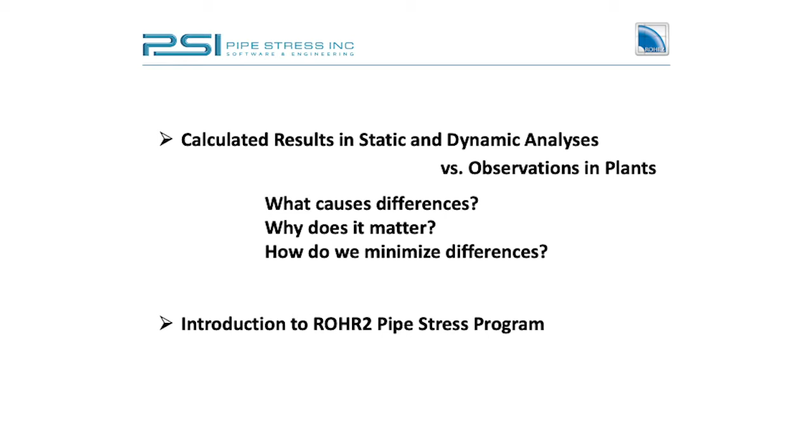And I'm going to tell you a little bit also about the Rohr 2 pipe stress program. I was reminded what Rohr even means - Rohr means pipe in German. It's a German product, I've used it for just about 30 years. I've used Caesar for just as long, pretty much, and other products like AutoPipe, pretty much all products.

All right, let's dive right in. So you'll see this screen occasionally, and you'll know kind of where we are. So we are at the top.

When one puts this kind of geometry in Caesar or Rohr 2, it doesn't matter, the weight will distribute itself statically, and you'll have, let's say, half of this piece of weight on the nozzle, as well as a flange and some things in the local area. There's vendors on equipment, for example in turbines, that say we don't want to have cold load on the nozzle, because we want to see the flange, the piping flange, float above the nozzle, and we want it to be parallel too. We don't want to be at the top, because now when you tighten the bolts, you're going to get a moment. So what do we do?

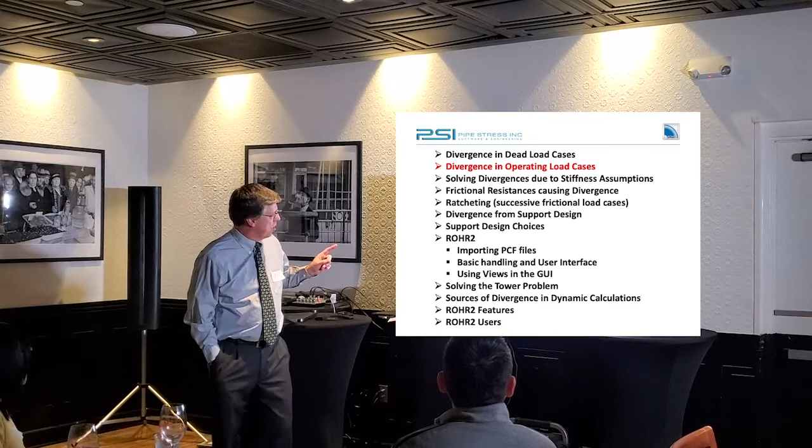These kinds of things are something you're very familiar with, especially east of Houston. My client said, here's what we're going to do. We're going to hold onto the pipe here in all translational directions, and we're going to guide it a couple places down the tower. It's a very common arrangement that you hold the weight of the pipe near the nozzle at the top, so you have very minimal strain in the thermal cases between the support and the nozzle.

Well, that's not the way the program works, right? You put it in, I have a hard time connecting it and not connecting it. So there's no free node, there's no string. And my client says, well, tough—I want to see the 900, I want to see 0.

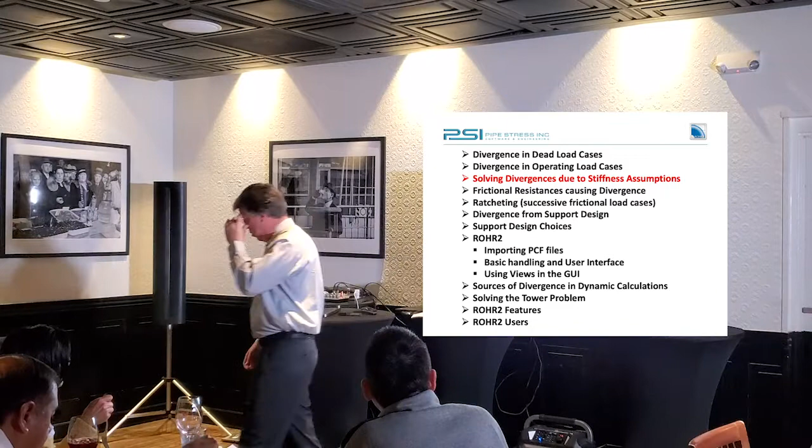Now, I'm going to come back to that. I'm going to show you what I do and what I did for this client. We're going to talk a little bit more about engineering and general things.

Another thing is, in this case, let me show you this. You could have in the operating case divergences based on these relative stiffnesses. We're fairly confident about the stiffness of a pipe, but we're maybe not as confident about this plate that's holding it, especially where the plate hits the vessel.

There's spring stiffnesses, it gets pretty muddy there, and if it's too muddy, we're having divergence. When I say the word divergence, I want you to think about calculation versus reality—that's the divergence I keep referring to. Since a lot of this talks about that divergence, what we do about it, and where it happens, you're going to hear that word a lot.

Now, the next topic about divergence - frictional resistances that cause divergence. This is a big topic and problem with pipe stress, because the frictional resistance is essentially a force opposing the movement that the program calculates. These forces oppose the movement by the friction coefficient times how much weight is there. There are a lot of different ways friction causes divergence. At some point I'll move into how we solve this - one way is to try to bracket the problem, because friction can be a very large issue.

So the cold to hot would be in that situation. What about when - friction is of course not a one-time event, so it resists and then it kind of slips, right? Because of kinetic friction versus static friction, it resists and slips many, many times during the warm-up. But essentially you're only seeing one side of the moment, and because we don't show that it slips, we just see these opposing forces - you can actually have a nozzle load lower than it would actually be if there were no friction. We can't rely on friction to help us out with our nozzle loads.

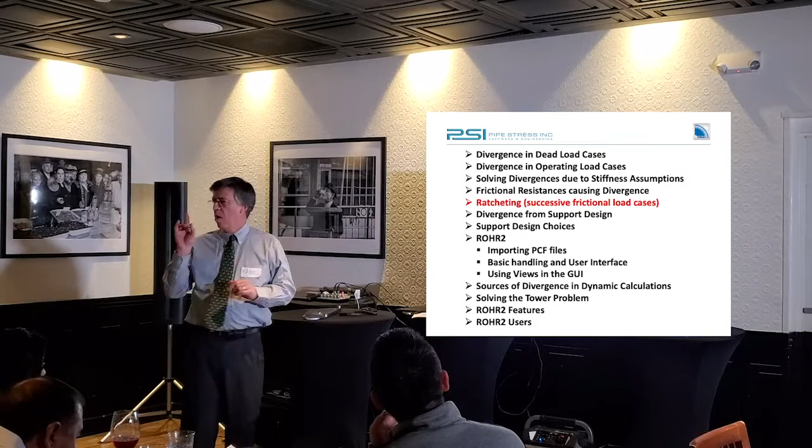All right. You can interrupt me if you have a quick question. I don't want to take a lot of time going down a bunny trail, because I do want to finish.

Okay, on the same topic of friction, in my observations in the plant, many times I've seen this happen: ratcheting of the pipe. That is, the friction going one way is a little different than the friction coming back, so it doesn't end up where it started. Again, divergence, because in our models we go cold to hot, boom, here's the loads, end of story. However, in real life, pipes tend to ratchet themselves to places you could never have imagined, till they're off the steel. They were once up there, now they're down there, and this poor guy that used to be held up is now bent, right? This happens fairly often.

And so, let me show you what I do for that ratcheting kind of thing. I've made a model that's very simple, and not only can I in ROHR2 go cold to hot, I can go from hot to cold. And then I can tell ROHR2, in one load case called a follow-up load case, repeat this 1,000 times. Usually if you repeat it 40 times or something, you're going to see if something's happening, or if it's actually going somewhere.

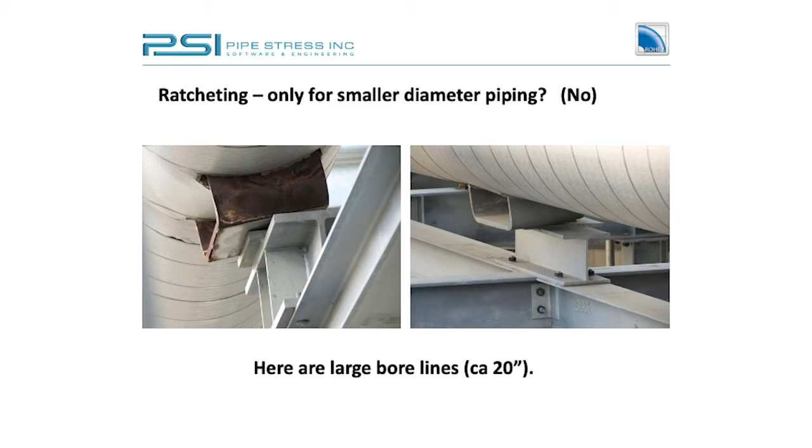here's a large bore pipe, 20 inches, that ratcheted itself, not a good situation. This is an interesting case. I'll confess, it's on a plant I designed in '99. Took this photo when I came back. This is a bypass pipe that goes into the condenser. This is attached to the condenser in very near proximity. The shoe started out there. It's not there now. It hasn't fallen off yet, but it's getting mighty close. So every job, luckily, I get to learn too.

All right, we talked about how the friction is nonlinear. That is, there's not only the static coefficient but the kinetic one, and it kind of shifts a bunch. So, depending on how much stiffness the steel has to give and then bounce back, you can make a huge steel model. This is in ROHR2 in the steel model. But in the end, if we don't bracket the problem properly, like this broke out from friction, the friction was not looked at correctly, and the calculation pulled the Hiltis out of the ground. So there's a lot I can show you. I've got mounds of pictures of things that happen in the plants. I'm not going to bore you with all of them.

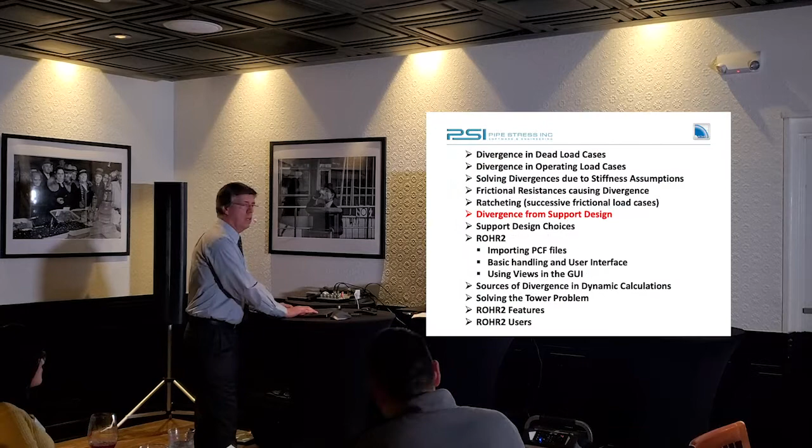All right. The next topic that I want to talk to you about is support design. Now I understand some of you aren't support designers. We're more of a pipe stress organization or association. But the pipe stress people have to have some idea about the support design. They have to know that the support design will, in fact, mechanically carry out what they're assuming in the stress analysis, and often that's not the case due to workflow and so forth. I'm not going to go through this all, but support design is where I'm going to focus for a couple minutes.

It's crucial to ensure that the support design carries out the intended function. I'm going to show you some examples where it didn't, and it's not necessarily the stress guy's fault, but the support guy goes, I'll put a shoe with some clips around it or whatever. I'm going to show you what can happen. And it's also important that the stress analysis doesn't make unrealistic demands of the support design. I'll show you an example. All right, I'm going to start with a very easy example.

I do some auditing work of stress analyses, and I've tried to erase the innocent and the guilty, so hopefully nothing will slip. But here's a steam pipe. A turbine was here. This is the design. And originally the reason I got involved is the turbine had a problem. And this support here was a moment-only support. Okay, you can laugh now. You can make those things. You can't go to CAESAR and put RX, or RY or RZ. It doesn't work. It doesn't exist.

Finishing up with this support design. There are different types of supports. Some have friction, some don't have friction. Some have gaps, some don't have gaps. The gap and friction issue is kind of married, because if you have a frictional support, you kind of need a gap. It's hard to not have a gap, it's going to get stuck, right?

So I think as pipe stress people that drive which support is going where, you have to make a distinction between supports that are near sensitive equipment, which is more or less what I've talked about now. If you got a pipe going straight down the pipe rack, yeah, it's not that critical whether you have gaps and friction. But it can be too, because the friction can gang up on you, if you know what I mean. All the frictional resistances add up, and all of a sudden you have a 10 kip load.

Your civil guy goes, where do you get this 10 kip load from? Yeah, it's all the frictional resistances ganging up. Which is another reason you could run a no-friction load case to see what part of it is bending the pipe and how much of it is just the friction ganging up. And it's not always conservative, right? So you could have the friction canceling itself, but since it's not all concurrently acting as it does in our programs, you could have a lower load too.

Alright, so make a distinction between supports that you care about and some that you just kind of guide so it doesn't fall off the rack, right? And I'll reiterate, the support design in critical supports, near critical equipment, has to be driven by the stress guy. Somehow, the management has to follow up to make sure that it's being carried out. I'll show you an example.

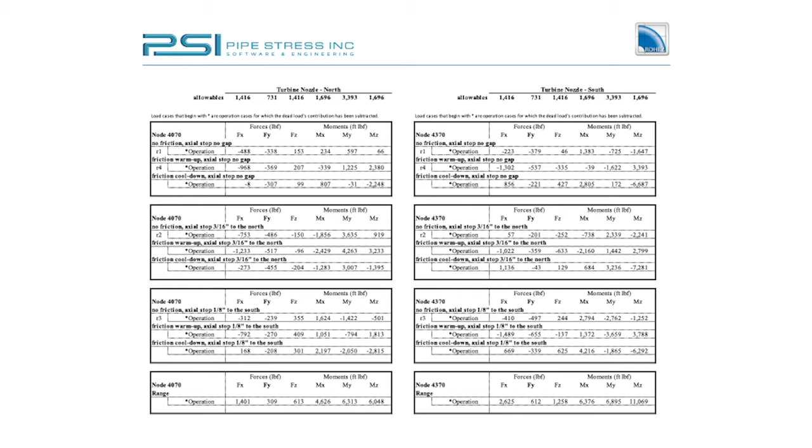Is that how the report comes out of the program? This is an Excel table. Yeah, the reports come out of the program very similar, but this is Excel because I'm trying to show. Here's no friction, no gap. Here's just adding friction, and here's adding both. And I did the moment reversal, so this is heating up, this is cooling off, and now I have a moment range that's 11,000, and it should be 1,600.

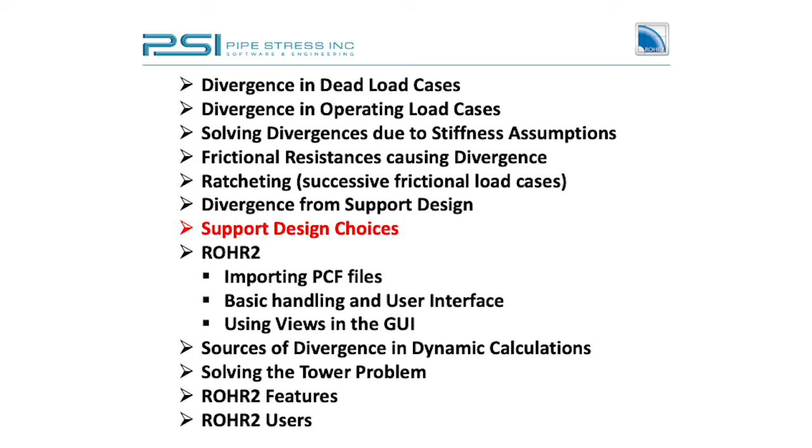And so I tried to explain that. At least you can read that. The other stuff that you get from other programs, you can't read. Alright, so I want to show you some physical supports. So you go, okay, I understand that this support should have no friction, no gaps. Absolutely it shouldn't, because friction and gaps mess up all your loads. That's why the guy didn't put friction and gaps in. But now the support designer has to carry out this function.

And I'm not implying with any of my stuff you guys don't know this, okay? So here's supports with friction and gaps, just some schematic. And because I say you have to have one without friction and gaps, I'm showing you a photo of one. Here's a support that's an axial stop. It's only restraining the axial translation. There's no rotational stop. It can go pretty much everywhere and turn around every axis because it's pinned. And these are rigid struts, and it's even pinned with what's called a round lug that's on the pipe.

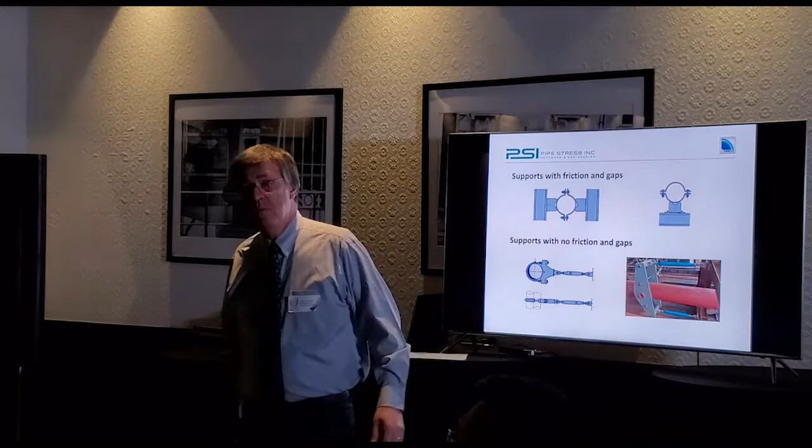This is Lisega hardware. We don't sell Lisega hardware, but the concept is fantastic because you can really move the pipe any which way, and Lisega developed this a long time ago. For an axial stop, I don't think there's anything better. And if you support it on a piece of concrete or a rigid point, you will have zero movements on the pipe. You won't have zero movements on the pipe if this is not connected to concrete or something rigid. If it's connected to the structure, you will have some movement. That's right. That's why you have to have rigid steel.

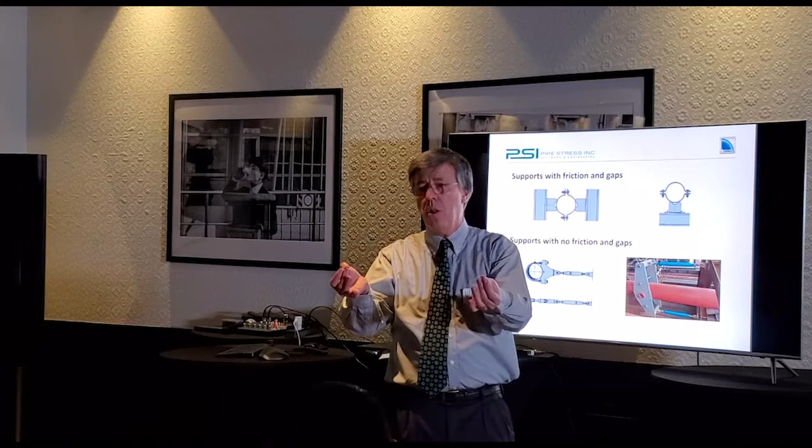That's a structural guy's job. These loads, incidentally, is a good point, and I'm not trying to negate that, but these were not very large loads. They're very small loads, and so the movement can be zero even with reasonable steel. If it's huge loads, you definitely need to look at the flexibility of the steel, and that was on an earlier slide. But this is to center the piping on the turbine, and even a small movement caused by a very low load would make an absolute nightmare of your turbine nozzles.

So my point is, some things are good enough to get the job done, but in support design, there's some choices that are not good enough, and they will not get the job done in certain locations, okay? Like I said, you're out there on a rack somewhere, it's all good.

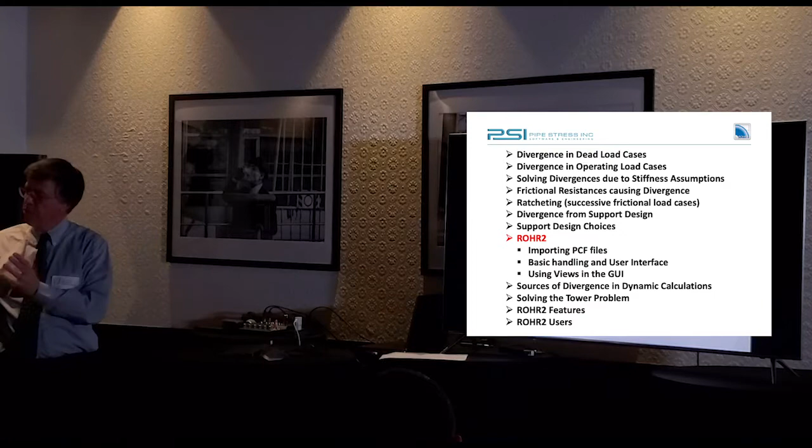Alright, I'm going to show you some ROHR2, so you get a sense for the user interface. And to your point, I'm going to show you quickly how to import PCF files. I'm going to show you a video from my website, because for me to do it's going to take longer than for you to look at the video. So humor me on that.

And then I'm going to show you in real time some basic handling of ROHR2, and then I'm going to talk about views, because I used to make kind of the inlet piping, the outlet piping. Now I put a lot of piping in one model, and because you can view just this or view just that, I'll show you that. I'll introduce you to that part, and then we'll talk about a couple more things.

So, in this video, I am going to show you how to import piping geometry into ROHR2 using piping component files, or PCFs. In ROHR2, click File Open, or simply click on the Open Project button. On the File Type pull-down, you will notice many neutral file formats that ROHR2 can read, such as CAESAR II, Intergraph, Autoplant, but for this video, we will choose PCF.

ROHR2 has the ability to open more than one PCF file concurrently. Typically, each pipeline name's geometry is stored in one PCF file. After choosing all the files wanted in the analysis, they are opened into a mechanically contiguous model. At this point, we are already in a position to run the analysis with the default load cases ROHR2 has created based on the temperature and pressure given in the import.

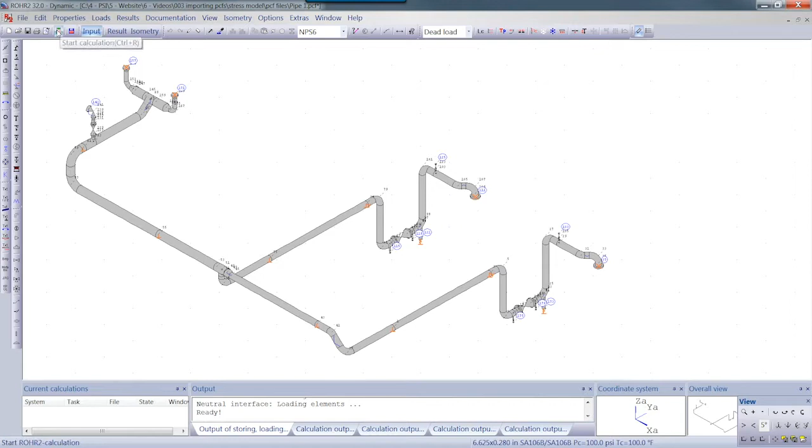We select all load cases and hit OK. Since we haven't saved the job yet, ROHR2 prompts us to do so. We will call this job test, and ROHR2 saves the job and runs the analysis. The job has run with no errors or warnings, so ROHR2 has saved, checked boundary conditions, designed the springs, since there were springs in this model, created and run the default load cases, dead load, operation, and shutdown.

Shutdown is a so-called follow-up load case to operation, where loads associated with returning from operating to ambient temperature are calculated. ROHR2 creates the default reports for the spring design, support loads, stress analysis, and a plot of the geometry.

Before we end the video, I'd like to point out that ROHR2 does retain the information that comes via the PCF file. The line numbers, which we arbitrarily called Pipe 1, Pipe 2, Pipe 3, and Pipe 4, are part of those piping segments data. Any support tags or nozzle labels are also retained. Thanks for watching.

Alright, I can't do it that quick in real time, so humor me with my boring voice in the video. My wife points out, that's like the most uninteresting voice. And in real life, it's not quite as uninteresting. You might think, gosh, I kind of like that boring voice, man. I'm waking up to it.

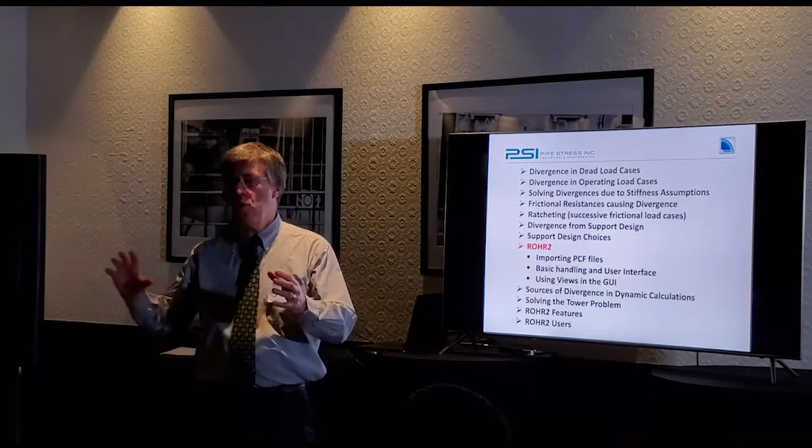And what about exporting to other programs? Exporting. Can I answer it at the end? Can you remind me? I won't go there. Got another question to this? Yeah. Are those sections imported or are they attached to an existing program? I don't know if I understand. If you have a program running or one system, you can attach another system to it and detach it. In ROHR2? Yeah, can you? Yeah. Or is it imported and stays there forever? No. Like you can. I constantly bring more stuff in and put it all together.

And to briefly answer your question, you can write PCFs, you can write CII files. There's some, you can get out of ROHR2 also. I mean, that would probably be the most useful.

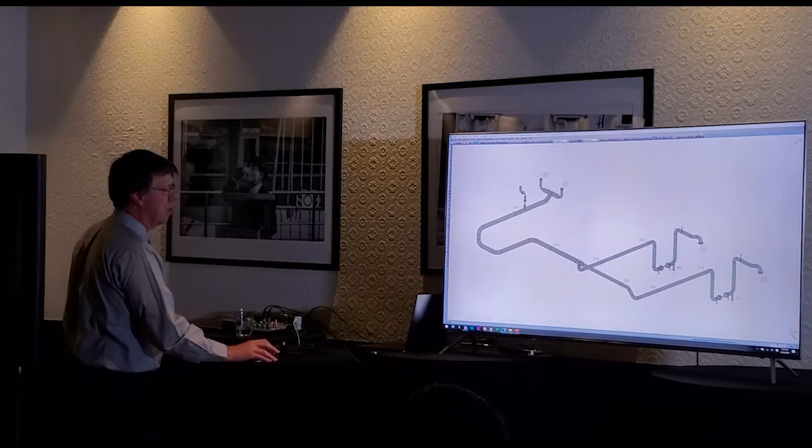Alright, I'm going to show you in ROHR2 just some basic handling in real time. I'll tell you what I'm going to do, and I think you'll get the idea very well. So I'm going to go to my next model, the one you just saw, and show you a couple of highlights here.

One thing I really love, I'm not saying nobody else can do this, but I don't know what programs y'all use. One thing I generally don't like is like iTunes, managing my life somewhere. I'm old school, I like to make my subdirectories, I like to do it that way.

But one thing I love about ROHR2 is the revision manager. If I go Alt, File, Save As, it ups the revision number. I can put in here based on, in this case I'm on revision 5, and it pulls up 8, because when I was in my hotel I saved it a couple times to 7, so it knows the next revision number. Then I'd type in there, based on revision 5, took out the loop, or whatever it is. So now, on one job I went over 100 revisions, and I have a record of every revision and what I did to the models. Very handy to have. So I'll just save it here.

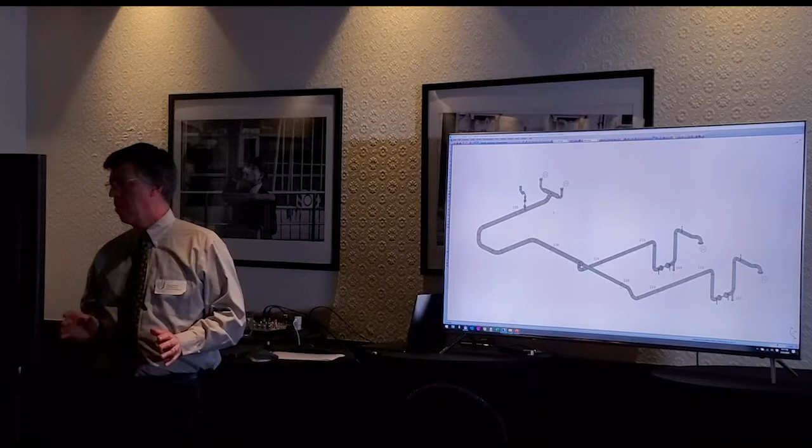Another thing is, after I import the PCF, there's two things that happen. One is I generally end up with lots of little piping I don't care about and don't want in my model, because it clutters it. I generally want to erase it. Very easy to do - you can filter the model by line size, select everything, and delete, and it's all gone. I'm going to show you how to do that in a second.

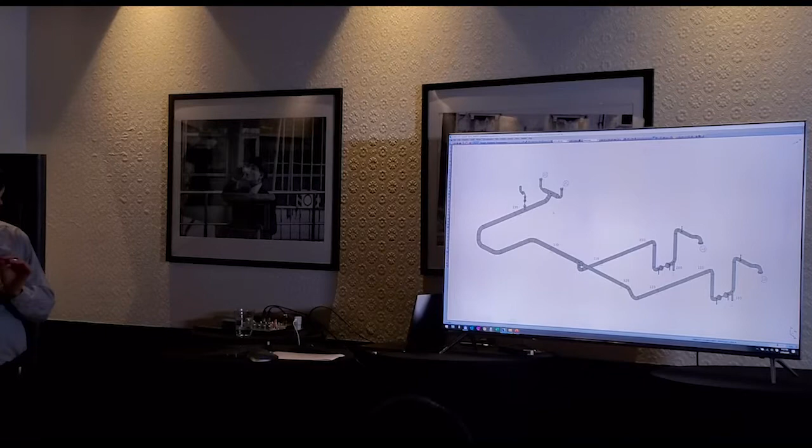The other thing I like is, it happens probably never to you, but the model is not mechanically continuous. The designer a lot of times sends me, 'can you check this,' but they really haven't run the ISOs yet, they're not really ready, and at a gasket you get a discontinuity mechanically. If you don't notice that, and you put a lot of work into it, at the end - for example here, if this wasn't connected, none of this matters to that nozzle.

So those are two things I want to show you real quick. What I do to erase the small bore piping - I can see my mouse there, all right - I would go to this segment properties. Whoops, I clicked on the wrong thing. Where I can address and filter out segment properties.

I go to this nominal diameter, probably the easiest one - these are the pipe specs. ROHR2 is a pipe spec driven program, so in the pipe spec you have your diameter, your insulation, anything physical about the pipe is in the pipe spec. I usually start at the bottom and work my way up. So I go, okay, I'm not going to delete that piping, not that one, those are the dummies with the springs, not going to delete that, not that one. In this case there's only one pipe spec I'm going to delete.

So I've filtered it down, and I can select multiple pipe specs. Then I select it here, and hit the delete button, and bam, they're gone.

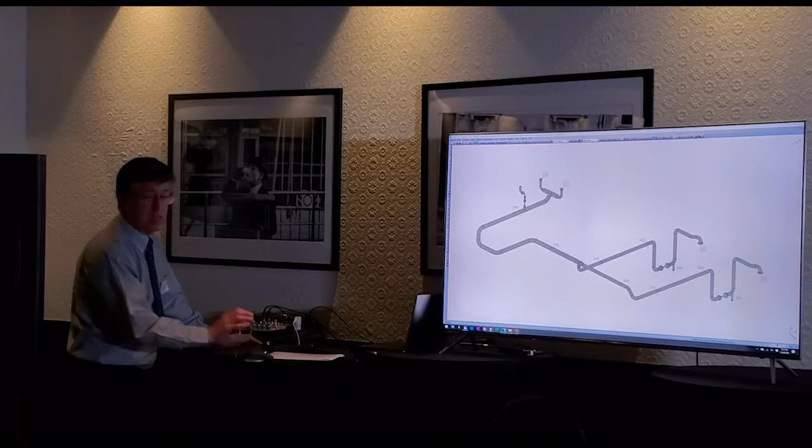Now you'll see in this case there are small nodes here - those are the nodes where the pipe was connected. This is very easy, either to erase with the eraser, erasing the node and going to this dot which you can't see, or you can highlight the piping or select all the piping for which you want to delete intermediate nodes. Remember, I'm doing this at the beginning after import, so I've not set any arbitrary nodes on. All the nodes that mean nothing - not a line number change, not a temperature change, nothing - they're just hanging out where something was connected, or for no other good reason.

A lot of times guys that spool the piping put a node in - I don't care about the spool. I don't want nodes all over my model, so I'll select everything and delete all these nodes. I can do it with the eraser, or I can just select all, and then take the eraser and say delete all intermediate nodes.

Now if you want - there's an intermediate node right there. These nodes are a little bit small, I can make those a little bit bigger. Everything's customizable, but I can make the nodes a little bit bigger. But all those intermediate nodes there, where the drain and vent were, they're all gone now in one step.

I can clean a model up very quickly, and I would never build anything by hand. If I can get any file, I don't care what it is, I want to get it.

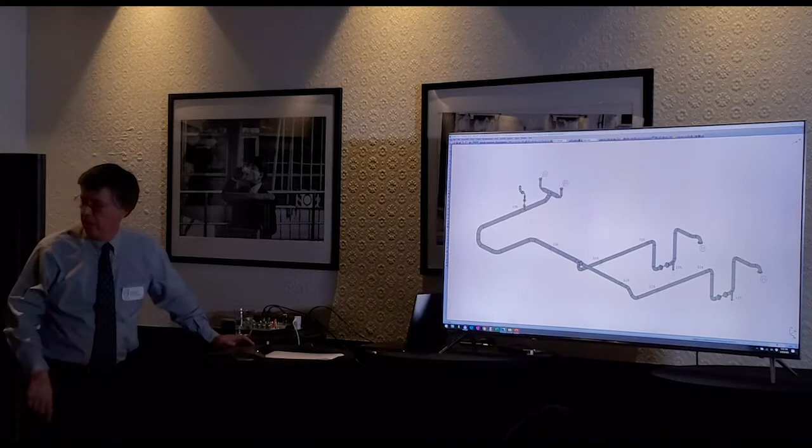So the next point was this thing about discontinuity. I'm going to create a discontinuity here and set a node. If you click closer to that side, the measurement will be from the node you're closer to. I don't like to read that window since you have to answer that question, so I'll just go 2 feet out, then put another node 1 foot out. Because of this graphics, I'm going to make these nodes a lot bigger.

Now you can see the dots—the dots are the nodes. Let's erase this segment right here. Now I just take the eraser and it's gone.

Again, it doesn't have to be mechanically contiguous. ROHR2 doesn't really care—it can exist in space because there are absolute coordinates it was imported in. So I could actually move this node a foot that way, and it would be on top of the other node without necessarily being connected.

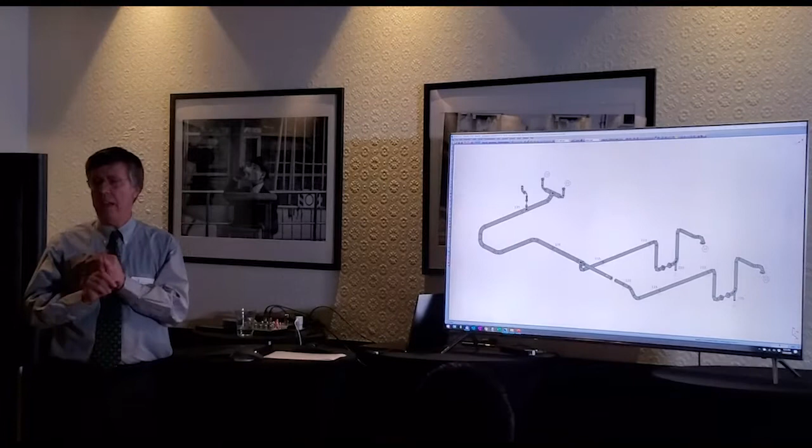ROHR2 will tell you, hey, do you want to connect, because you're right there. In fact, when you import a PCF, there's a parameter you can set that says any 2 nodes closer than a certain amount get merged. I don't do that—I don't like something happening that I don't completely control. I have that parameter set to don't do it.

But I could move that node a foot over and it wouldn't be a discontinuity, and you'd never see it because there's no gap. The way I would detect it is I'd go in here and say show me only end nodes. So I go to node names, select by geometry, and only end nodes. Now the only nodes on the screen are end nodes—end node, check, it is an end node.

What you'd see here, in a situation like a gasket, is you'd have to zoom in forever and still not see it—you'd just have an end node in the middle of a pipe where the gasket would be. So with one view of end nodes you can get a sense and say, is there a mechanical discontinuity? In this case it's obvious because there's a huge gap.

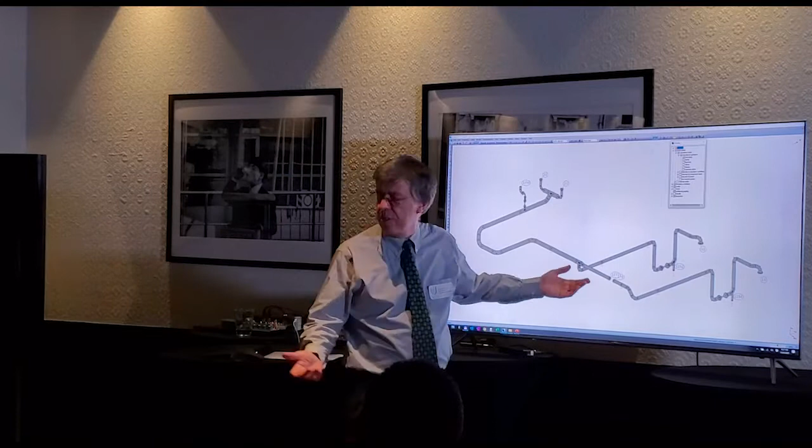How do you fix it? Well, there's a function where you can pick the 2 pieces of pipe and just connect them, even if they're not completely in line. Or you can go to the move command—I grab this move tool, go to this node, and just click it over to the other one. ROHR2 asks, should the segment be connected with node blah blah blah? You say enter, yes, and it's now connected. The node's still there; I can erase the node with erase node and click on it.

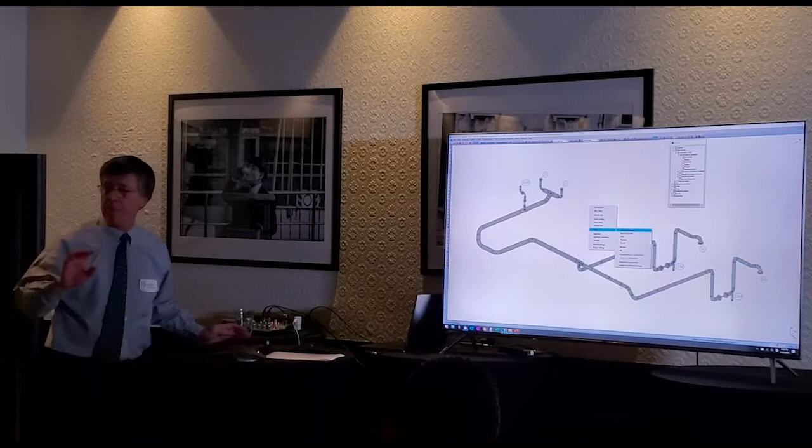I'm going to skip a couple things here, but I want to show you sloping pipe. I'm big on sloping pipe—steam piping should be sloped. You might end up with it; I've seen many turbines wrecked because of puddles, endless piping out here, and dead legs. So if you get sloped piping with your PCF, that's fine, but I'm going to slope a piece here.

So I'm going to select start to end node, and let's slope this piece—from here to here. I've selected this, and then I can do edit direction. Right now it's 0 in the X, something in the Y, and 0 in the Z. I'm going to say I want -1 foot in the Z, enter.

Then ROHR2 says, move connecting segments—meaning if you move this down a foot, do you want all this to move down a foot globally in the global coordinate? Yes, that will happen. If you say no—I'll hit N for no—you see what just happened? Now it's sloped down a foot, but this piece is shorter.

Okay, now I can undo with Control Z. See how it popped up? I can redo with Control Y. Probably I don't ever redo, I always undo. So now redo.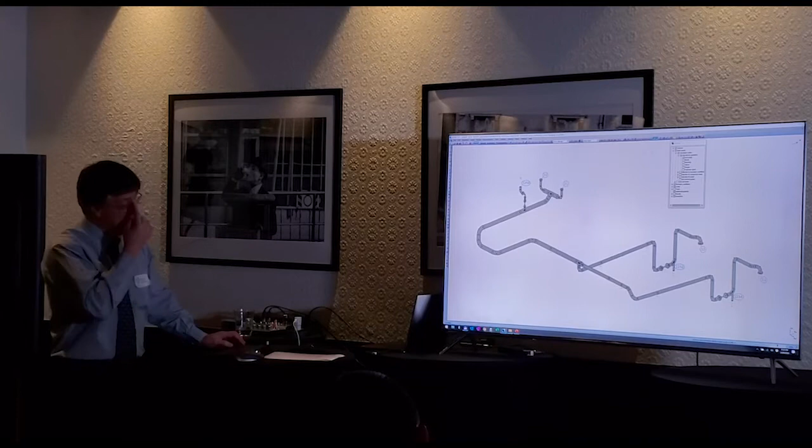If you wanted to move this support on the slope pipe, I can move it, and I'll click on the node. Even though this node wasn't on before, ROHR2 turns the 2 nodes on. It knows it's slope piping, and it will automatically put the axial check mark up here and ask, do you want to go towards 168 or towards 110? I want to go towards 110, and something obvious, 3 feet. You see? Now I just went down the slope piece of pipe. I don't have to go over and down. It knows, bam, and that's pretty convenient if you're in that situation.

What dimension did it take? The dimension of the slope pipe or the other dimension? Yeah, that's a good question. The direction, in that case, if you pick axial, it's the direction along the slope pipe.

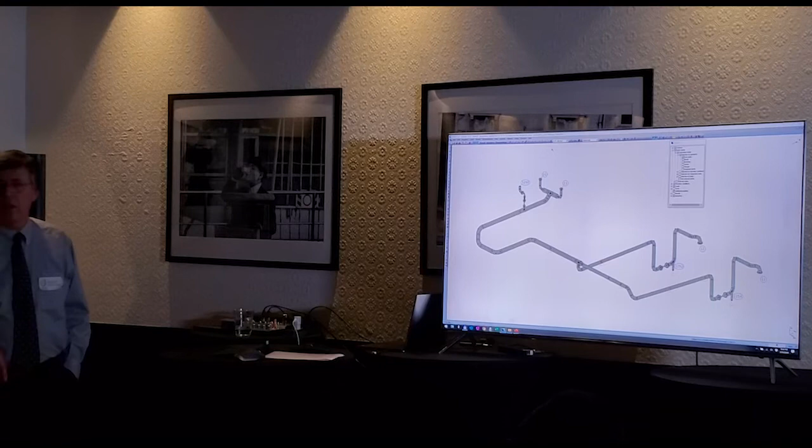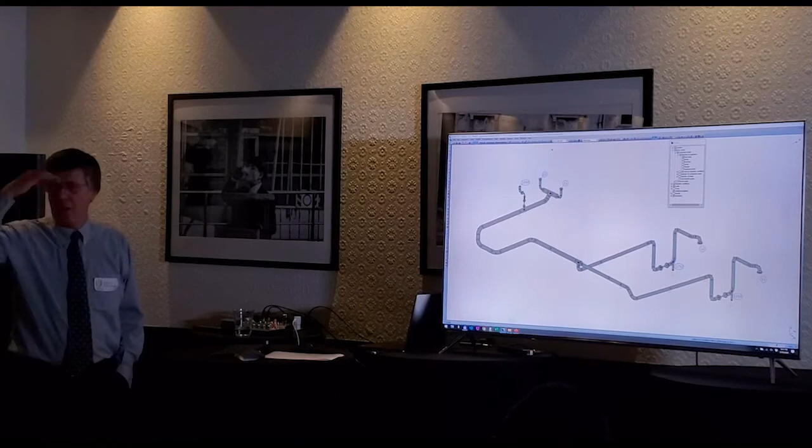Normally we only have the direction of the horizontal pipe. Well, then you have to- I understand the question- dimensions, but now you have to go back and calculate how much. Yeah, well, usually when you have slope, honestly, the difference isn't a whole lot. Well, it's better than going only in this direction and then having to figure that out. It's gonna be pretty damn close if you go straight. Yeah, but I understand your question, and maybe there is functionality. I don't know everything about ROHR2, I mean, every job I learn something. So if I say it doesn't work, honestly, after many years, I figured out something just in the fall that I'm like, how did this get past me for 30 years? Well, so alright, so I'm gonna...

I'm gonna show you two more things. If you wanted to get rid of this loop because it's having a collision, I'm going to set a node here, because if I erase this piece, then I've got to add another piece. So I'm going to measure from here to there with the intention of copying this dy out. Then I'm going to use that number that's now in the edit paste buffer, put a node, and just paste. Now I've just created a node with the same y coordinate.

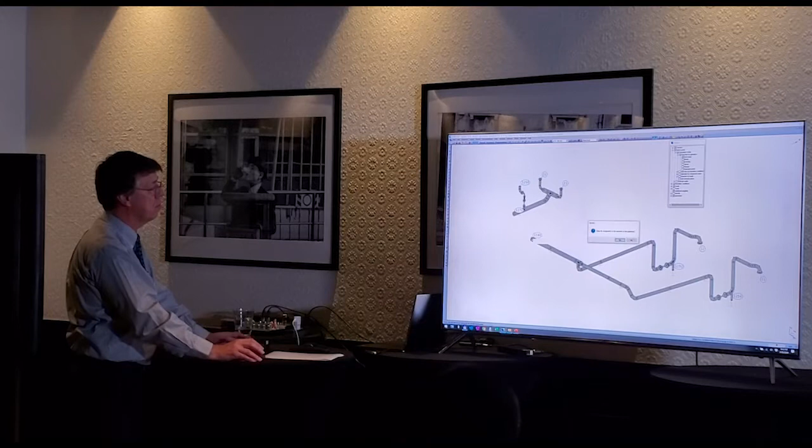Now I'm going to erase segments. I'm going to erase this segment here, and I'm going to erase that segment there. I'm going to select the window, this, Control X, take this as a handle, and Control V, paste it here. Okay? And it asks if I want to retain the pipeline name, that is the line name. I say yes, it's the same pipeline anyway. Then it puts the elbow in automatically because that's part of the spec. And that's it. Now I have too high a nozzle load.

I'll show you one example of an expansion joint if I can find it. There it is. Let's put a lateral expansion joint here, a foot out, with tons of manufacturers in here. But what we'll do is just make it 3 feet long, 2 feet between the bellows, and make 2 rods vertical. It's more than 2 rods, so it just built me a lateral expansion joint that has all the right couplings of the rods being vertical. The reason: if you have more than 2 rods, the ends of that kind of expansion joint have to stay parallel. If you have 2 rods, then there's one plane in which the expansion joint can also act as an angular joint.

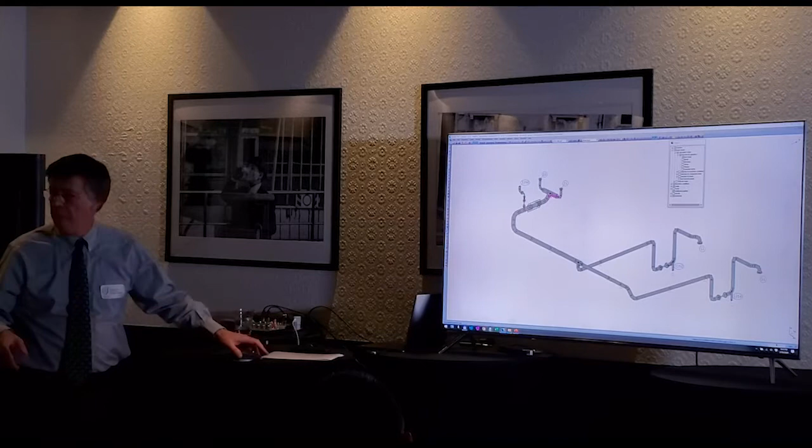And so, you can also copy and paste. If I would erase this valve- I'm not going to do it right now, but if I erased it and took this valve and highlighted it, and took kind of the elbow, if you will, and said copy this to there and put it in the existing pipe that's already there and insert the nodes- it would ask you, insert nodes into an existing pipe? Say yes, and yeah, it would do it.

All right, so I want to show you the GUI or the view thing, and then we'll move back to the engineering. But let me show you the view.

Because this is a really nice thing that I use very often with regard to the views. ROHR2's graphical user interface is simple yet very powerful. Let me give you a quick tour of some highlights. In this video, I'll cover two general areas of the user interface: displaying what you want, how you want, and then saving views. Most everything in ROHR2's interface is customizable.

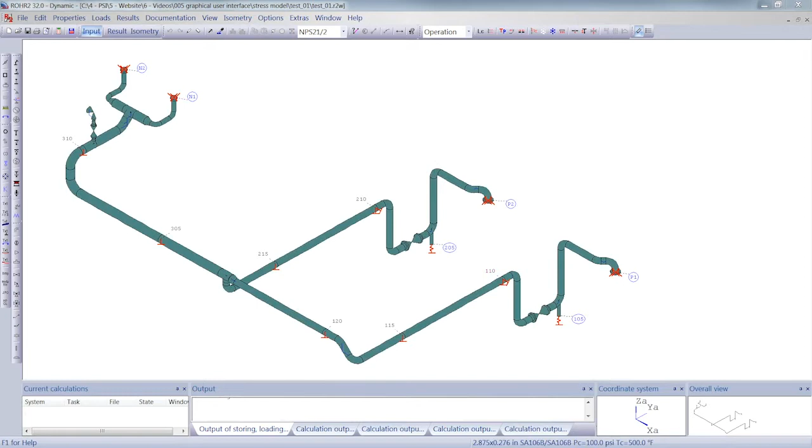The colors, line widths, text sizes, and styles, even what the mouse buttons do. As you can see, how things are displayed can be changed, but maybe more importantly, what is displayed is easy to control to a very detailed level. This button opens the window that controls what information is displayed. Let me highlight a few of the items on the list.

It is helpful to know the location of the nodes, especially certain nodes such as at the equipment connections or support locations. Showing all the nodes in an overview of the model can result in overlapping of node names. Although the node names can be moved, it still may be desirable to not show all the node names in certain views. Here we select just nodes at boundary conditions.

We can further specify which type of boundary condition, such as supports, and if that is not specific enough, we can select support types on a granular level. The boundary conditions themselves can be switched on or off here. Certain texts that are part of the model can be displayed, such as nozzle descriptions or support tags. This turns on a description of the spring, in this case, an Anvil B268 size 7 type F. Remember, the size of the text or whether it has a box around it is all customizable.

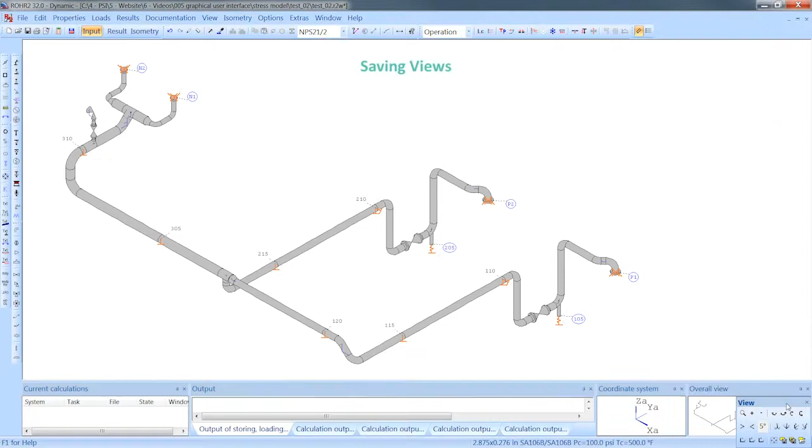All these options give rise to a need to store various views for later recall. ROHR2 can save views, which saves not only the zoom and orientation of the model, but also what was shown at the time of the save. Even views of results can be saved and later automatically inserted into the stress report.

When models become larger, views of sections can be stored so that the proper amount of information is in each view. Complex piping systems where piping is overlapping can be presented in a much clearer way by using views where the hidden piping can be shown with a dotted line or not at all.

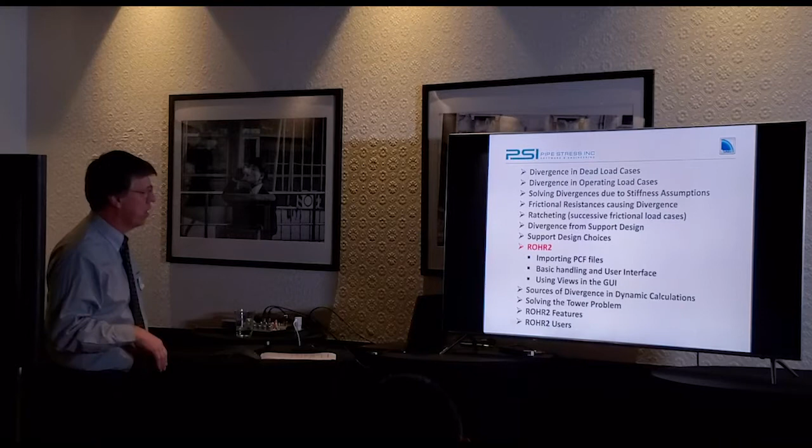I used to really avoid making large models because it just gets a little unwieldy. But with these views, you can just say, here they are. And they're views of portions that are somehow palatable, right? I've made some way big models, and with the views, it becomes something that can be handled.

All right, so let's go back to, actually, I think I messed up something. Where's my, oh, okay, we'll go back to this, the tower. So now I'm going to show you how to couple it and have zero loads. Think I can do it?

Yeah. Is this something anybody's ever achieved? Disconnect the nozzle. What's that? Disconnect the nozzle. Disconnect the nozzle, okay. Don't laugh. That's a good idea. That's a zero. That is zero.

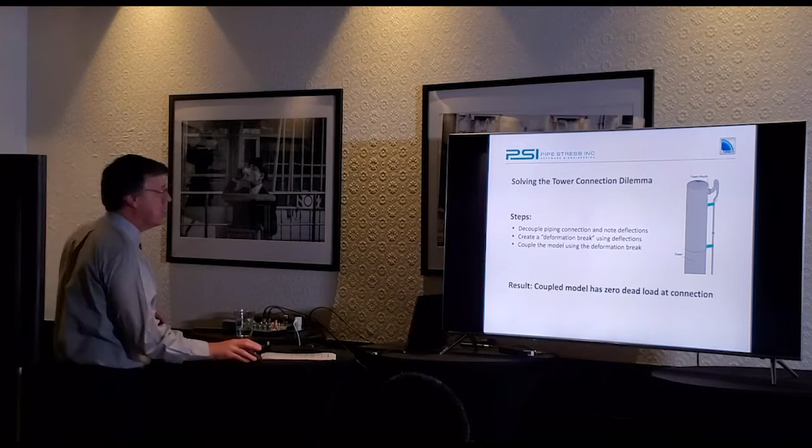Okay, we're going to do this. So I'm going to do it in three steps. I'm going to go into ROHR2 and I'm going to show you this model. Okay, so here's the model. I'm going to pull up a view that I have saved, just like I just showed you views, and it's called the nozzle, because I wanted to make sure I can pull it up so I'm not fiddling around with it. Here's the nozzle, here's the support.

The nozzle is node 10, the support is node 130. I'm going to pull up some results. I'm going to accelerate this a little bit. I wanted to show you the coupled, the uncoupled, and then what I did, but I'm going to show you all of it at once. So, you're not going to be able to read this, but I'm going to tell you the important things. There are three dead load cases here.

Okay, so here there's, and I called it coupled, which is essentially, I went to the nozzle, did it like anybody would do it. That's the coupled case. There's an uncoupled case. You get the prize.

Not a free version of ROHR2.

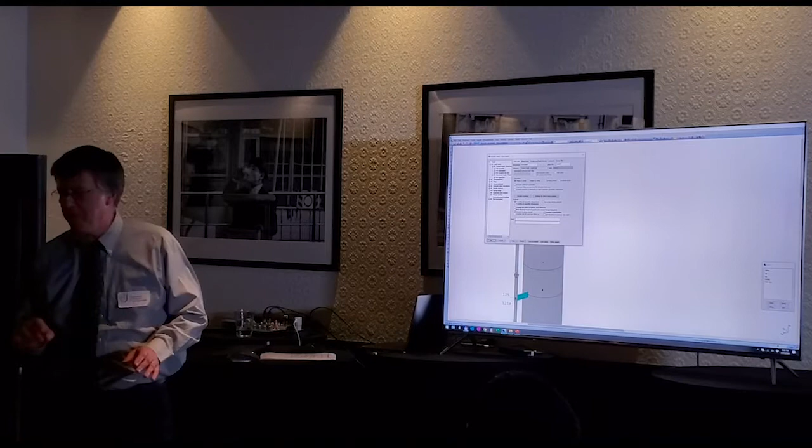And then there's a case called coupled with DB, because I was too lazy to spell deformation break. That's how I'm going to solve the problem. So, here we go. I'll show you the results again. I'm going to walk you through this.

So I put a hinge, which I can put the symbol on, but I'm not going to put it on right now. But at this node, where I just double click, they don't call it hinge anymore, they call it coupling. This is actually a beta version. It's coming out next week, but they now call it coupling. And so I put a hinge or a coupling where I decoupled everything, right? So it's all free. There's no QX, QY.

You can say I want to couple some things, don't want to couple other things. So I freed it up. And the interesting thing in ROHR2 is I can activate and deactivate that coupling load case dependent, which is beautiful. Because now I have a load case called coupled, where it's coupled, and a load case called uncoupled, where it's uncoupled. All right. And I can look at it in this beautiful output. I'm going to read it. I'm only looking at the vertical load right now.

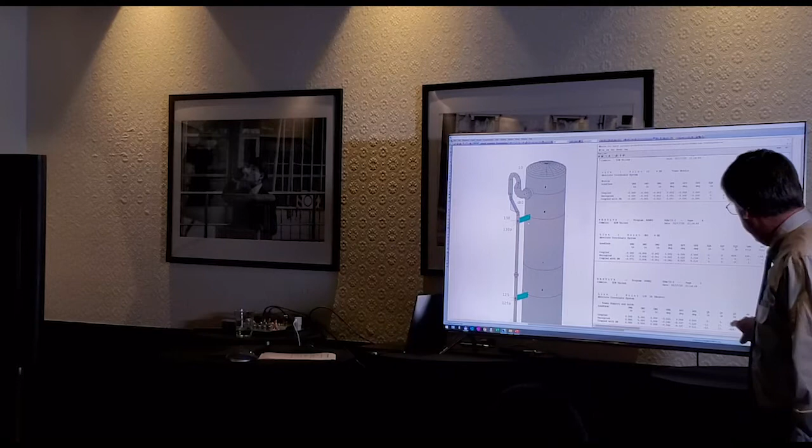So on the nozzle is 404 pounds coupled. And this is the deformation break that we're going to talk about momentarily. And on this nice support down here is 520 pounds. You gotta believe me or you gotta come up here. 404, 520. Client wants both of those down there. So now I uncouple it, and what's up here? 0. What's down here? 924. Beautiful. I sent him the analysis. No, because now the loads are up there too, and you're not gonna believe me.

What am I doing? I'm not going to try to explain it completely, but there is a point load function called deformation break. And what it's doing is essentially saying, I'm going to cut the pipe, and I'm going to cock it a little, move it a little, whatever. And if you take the movements, which are 0.073 in the X, and even less than that in the Y and Z, and half of a tenth of a degree. I mean, these are little movements, but they're resulting in big numbers. These aren't big numbers because it's a small pipe, but they result in relatively big and uncomfortable numbers. Because my clients go, I don't want these numbers. I mean, that's exactly the problem I don't want.

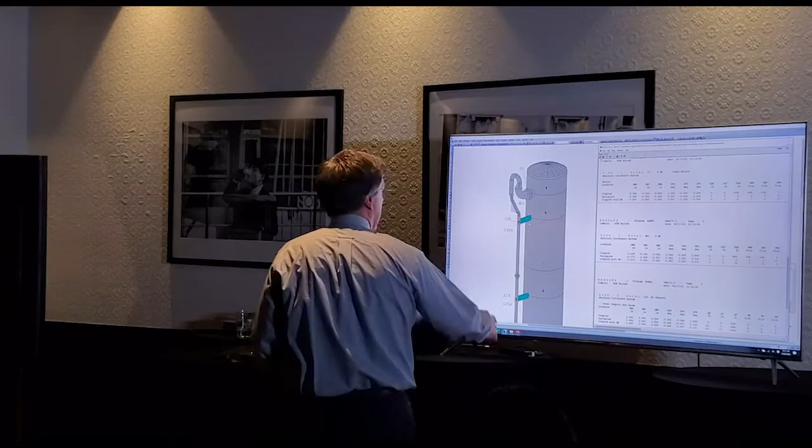So what do I do? I make this node, I've called it DB1 for no good reason, but it's deformation break, and I have inserted the deformation break, and now I've coupled it, and this third weight load case, dead load case, is called coupled with DB. It's just an arbitrary name, and you really don't need the first two. I leave them in just so I know what I did. When the piping geometry changes and I've got to change the deformation break, I want to go back to those load cases. But I can deactivate them. They're not good for anything.

But here I'm showing them in the output, and in the coupled with deformation break, I have 0, 0, 0, 3, -1, 0. Okay, almost perfect. There's such small movements. I didn't sit there and try to put 10 decimal places of movement, right? So it's 0, and the client's happy, and it's coupled. And down here at node 130, it's 924 coupled. Okay, so the problem has been solved with the deformation break. Not sure if your software can do it. I wouldn't know how to do it in another software, but ROHR2 can do it.

I have a question. Yeah. Are you taking into account the flexibility of the nozzle? Is that the deformation? No. Where is the deformation coming from? Because the nozzle flange and the pipe flange are bolted together, right? Yeah. So when that pipe is gonna be hot or whatever, that load of the weight has to go somewhere. It does. And in the operating case, I can pull up the operating case, I made this list specifically for this, you will have a load on the nozzle. The nozzle's not uncoupled. It's completely as coupled as it was previously.

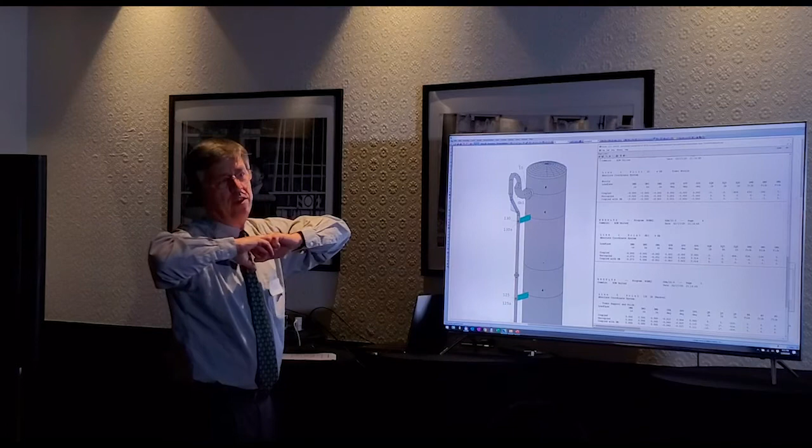Yes, so how did you get the deformation? I mean, it's not a deformation. I got it. All right, let me make sure I understand your question. The deformation that I used in the deformation break was gotten by uncoupling, by taking it off and looking at what's going on with the pipe. Just like a pipe fitter will go, what's going on? And then moves it. If you're going to call it a miter, it's kind of like, yeah, you got a kink in the pipe now.

But the problem is, let's forget this little twirling. If you have a straight pipe, you can't put a kink in the pipe because you're not going to end up with the nozzle, right? You have to end up with the nozzle. So where's the kink? Well, that's the thing. The kink is not there.

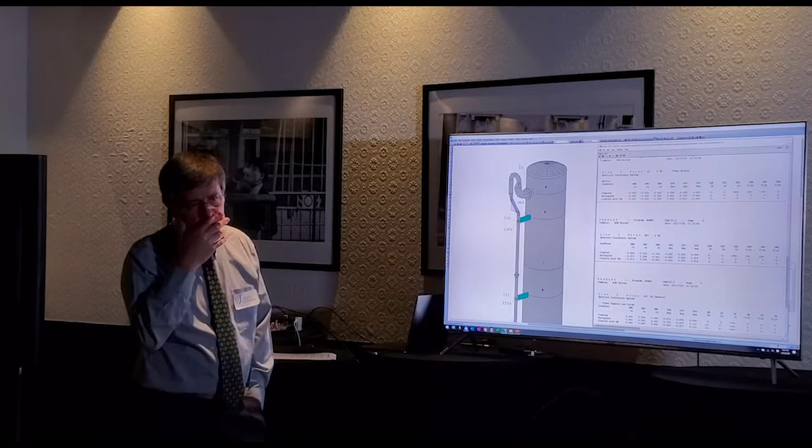There is no kink. This is a way to put kind of like a point load, except a point deformation. It's a load entry in CAESAR II that needs to be there for every load case. I think it's something similar to CAESAR, like a node in the C node. But the only difference is you can set a connection or not connection based on the different load cases. I think that's the major difference.

And another thing I'm kind of curious about is, for this coupling, can you set exactly the degree of freedom? Of course. I'll show you that. But it's different than the C node. The C node is like putting a deformation break between the C node and specifying that. Like a gap on the C node? It's not a gap. It's just a discontinuity. It's just on and off.

During construction, when they put up the connection to the vessel, you're running up the pipe to the vessel, you're running up the flange to the vessel, and then they're just flipping the bolts, and there will be absolutely no movements. That's why I have 0. So there's no deformation on the nozzle. So if you put this in the program, then you're kind of tweaking it, which is not true. No, you're not.

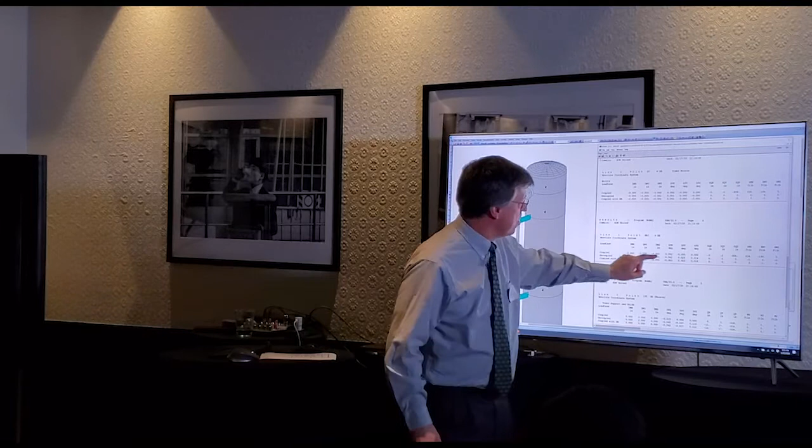I think the hold up right now is on the word deformation. Forget the word deformation. This discontinuity of deformation is literally what the pipe fitter would do. But you don't know that, right? I don't know it, that's why I ran an uncoupled case, so I would know that, just like the pipe fitter would know. And then I have to manually take these 6 numbers and put them in as a deformation rate. Well, you're assuming the pipe fitter is gonna do something to make it 0.

I'm assuming my client said, I want 0 here and I don't want these moments and forces up there. Because it's part of our plant's policy now that we've torn off nozzles, that you will put that pipe up there and you will not attach the bolts until, well, they probably attach the bolts, then put the jig in, then detach the bolts, then roll it up, right? And the jig is holding the pipe a little crooked, but we're talking less than a 1/10 of a degree. Alright, do you have an ISO that'll show them exactly how you want them to set it up?

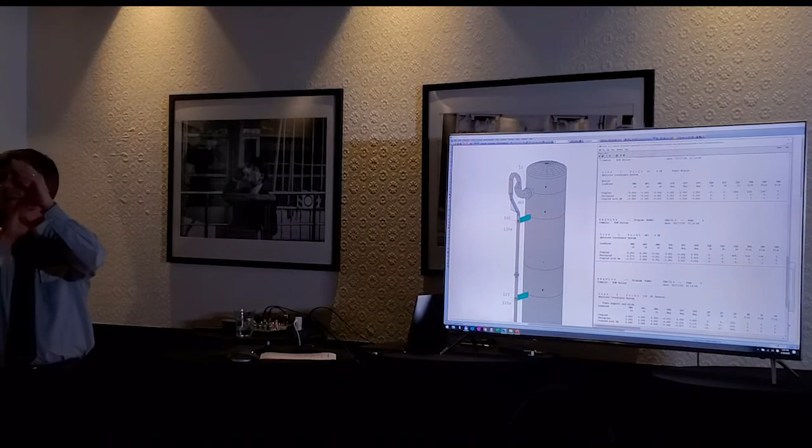It's not important, because whatever the deformation rate is for them, and let's say it's hanging crooked, we're all very aware this pipe doesn't go in that way. Because when they put it in, it's not straight. Ours is perfectly straight, built in outer space with no gravity, and then brought to Earth, and then gravity is brought onto the model. That's basically what we're doing, right? But in real life, you got a cherry picker, the thing's crooked from day one. And it's a topic that is very big and I'd love to talk about, because that's another discrepancy and another big topic.

But no, there's no way you're going to tell him to tweak it, because his tweaking is going to be different, but it doesn't matter, because numerically, I need 0 load, and when he goes up there and the pipe's hanging crooked, he's going to make sure it's straight. What's important is, even if his is a little this way and mine's a little that way, I need 0 load, and I need to see how the operating case then, from there, acts. And if he has it cocking a 1/10 of a degree that way, doesn't matter. The big picture is still the same.

There was one other question. We're gonna take questions at the end too. I think I'm almost done, and I don't want people to feel like we're going down a hole, but go ahead.

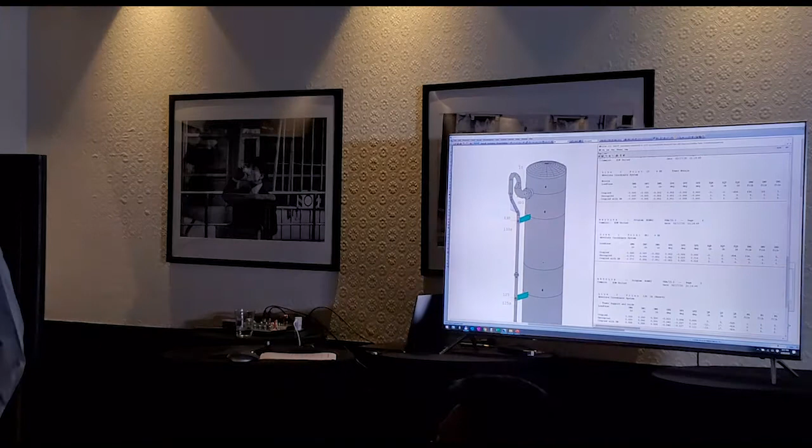How different is this from the cold spring? This is not cold spring. Nothing to do with cold spring. I know I've lost everybody on the deformation rate, and I will spend time with you individually and go through exactly what's going on if that's of interest, because this is pretty unique. But if you have a turbine, and Siemens is a pain in the neck about floating these pipes in and getting them straight.

They are irritating. And I've been on the recipient end of not being able to get my pipes floated in, busting my tail, and not having enough restraints and ways to turn buckles and ways to tweak springs. And the guy's like, dude, call me when you're ready, you know? He's having a beer, he's getting paid, but he's waiting for me to get a pipe connected. And it's super painful, so I'm very, very sensitive about when I make piping designs, support concepts, and guides and so forth. This isn't cold spring.

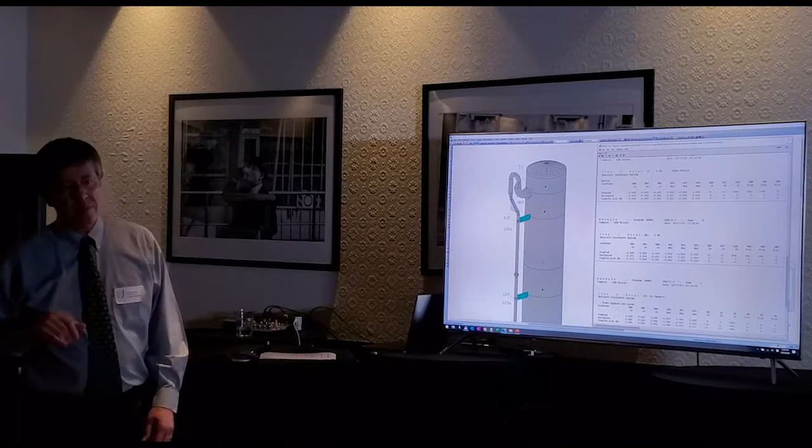I don't like cold spring. I personally, don't hold it against me. I don't like cold design of springs either, but this is another topic for another day. It's a big topic. Except, in my opinion, except the spring hand push, you can make adjustment. Otherwise, this coupling and coupling, even though you assume that the couple is not connected, you got a 0 load, assuming 0 on the nozzle. You still got a lot of loads on that brace. You cannot make any adjustment. So practically, I don't think it's any.

No, you're adjusting the pipe. The last weld is what you're adjusting. That's what you're adjusting. The fiddle. That's the only thing you're adjusting. Nobody's talking. The problem is you can't do a spring preload, and there's no spring. We don't even know the spring is in this thing, unless you can make adjustment. Otherwise, it's coupling and coupling. I don't think it's. All right.

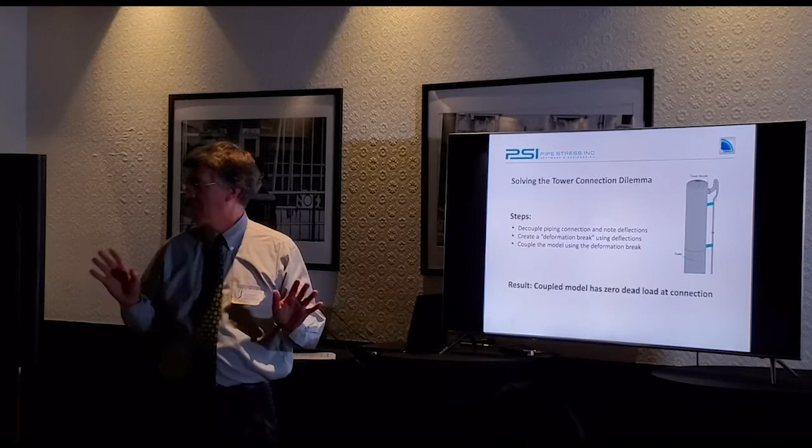Well, I'm very happy to discuss this with anybody. But it's a very great feature. I just want to be. It's a great feature, especially it's adjustable based on different nodes. I'm not trying to not answer your questions, please. I love this stuff, man. I can be here all night. I want to respect your families and your time. That's all. Besides my dad. All right.

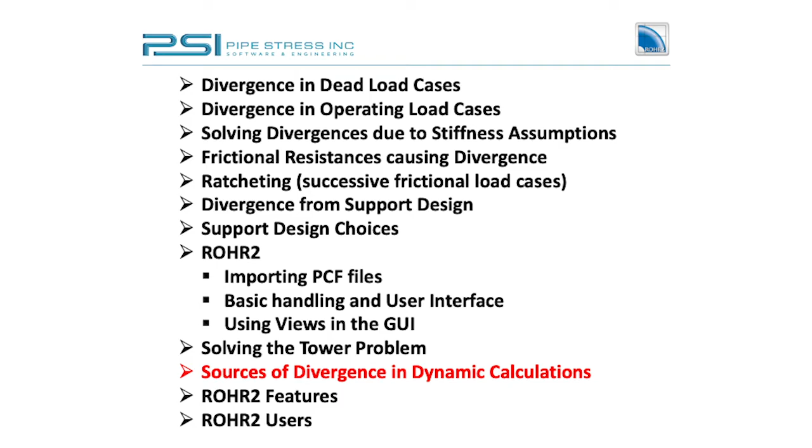And it is coupled, and it is no load cold. How that happens, I understand this is very mysterious for some of us, and please, take my card, I will get on a WebEx, and we will go through it in detail. There is no cold spring, the pipe's not crooked per se. You can't make it crooked, otherwise you never get to the nozzle, right? You need to get from here to there, and there's only one way. It's up this much and over that much, otherwise it won't be at the nozzle.

Alright, let me speak briefly to the sources of divergence in dynamic calculations. Dynamic calculations, big subject. I'm not going to make a huge deal about it, but I do want to point out something again that's very unique in ROHR2. All the other programs, unless I'm really behind on their development, but I'm very certain of this, all the other programs do the linear calculus. I'm not trying to besmirch these programs. I love these guys. They've helped me a whole lot in my career. I'm talking to them more than they probably want to talk to me.

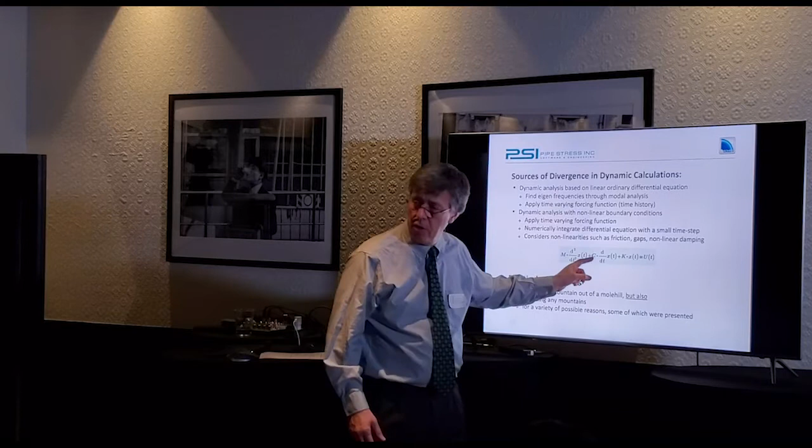But the dynamic analysis is based on what's called modal analysis or eigenfrequencies. You have this equation, m x double dot, c x dot. Everybody has nightmares from dynamics. But this is a linear ordinary differential equation. That means that these coefficients, m, the c, which is the damping coefficient, and the stiffness, are linear. They're numbers, right? So everything has to be linearized, so there's no gaps, there's no friction in your dynamic analysis. I'm sorry if you didn't know that. The gap is 0, the friction is 0.

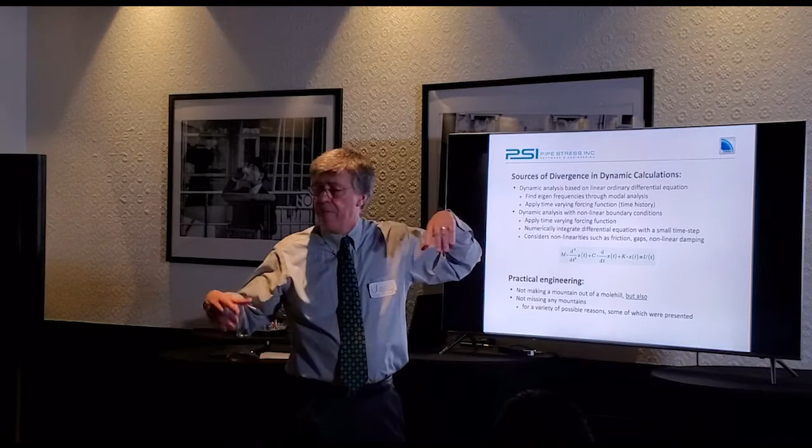But the friction is kind of important because it does dampen the pipe. And as much as I've spoken badly about friction in your turbines, Siemens says, we want friction out on the pipe rack because we want it to dampen the piping system. We don't want everything hanging around and kind of blowing around. So, the problem is that in all the dynamic analyses, there's no gaps, no friction. And furthermore, in the last couple of years, I've had a lot of nonlinear dampers.

There's a company, GERB, G-E-R-B, that makes these buckets of goop, okay? In a brutal way, but it's not very much more complicated. You have a stick that's on the pipe that's in the mud, right? Stick in mud in that goop, and this viscoelastic material has nonlinear properties that are frequency dependent. That is, this C is frequency dependent. It's very nonlinear. And if you want, in a linear calculation, you'd have to replace this by a spring. That's pretty much what you'd have to do. You'd have to replace it by a spring and say it resists movement.

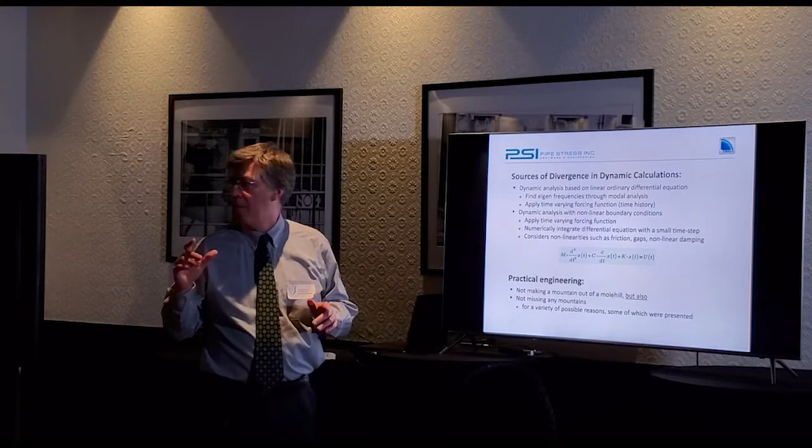But it's a very nonlinear, frequency-dependent damping characteristic. I have one client that used, I'm not going to say it, but a good program, but they used ANSYS to do piping analysis. Think about this. I don't know if you've used ANSYS, but to do a piping system in ANSYS is a painful experience. It's not a piping program.

It doesn't have class 1, whatever. It was a nuclear job, and you got to start making up how you're going to put these stresses together. I mean, this is teaching ANSYS how to do pipe stress. It's a chore. But they needed to use ANSYS because they needed dynamic analysis with nonlinear boundary conditions, right?

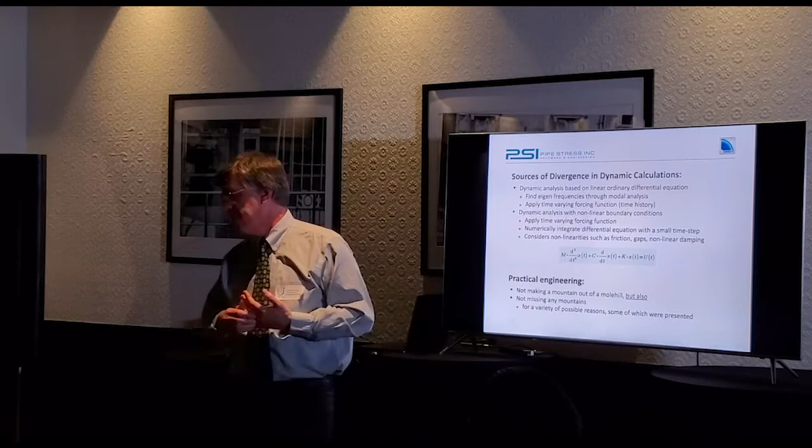So how you do that is you integrate this equation that's not as nice as this, but this is an equation you can solve analytically, which is essentially what you're doing with the eigenfrequencies. But when it gets crazy with the nonlinearities, you can't integrate it anymore. You have to integrate it numerically. ROHR2 has a module to do what everybody does here, and a module to do this, and it comes with ROHR2 to do the dynamic analysis with nonlinear boundary conditions. You can run two different dynamic analyses in the same model, and you can kind of see the difference.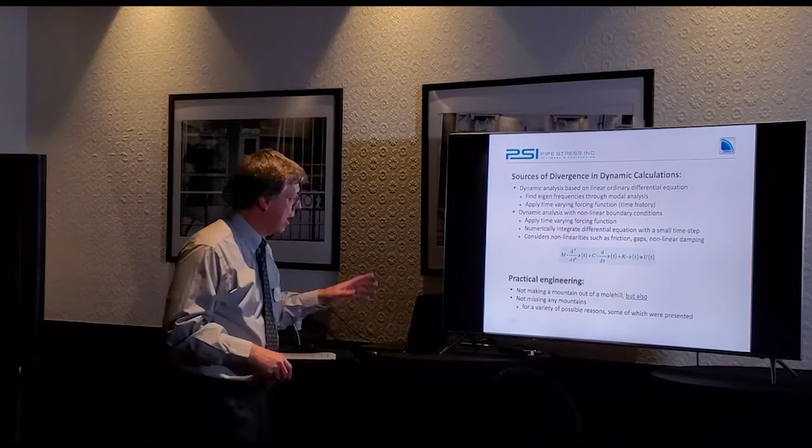Again, I love this. I'm very practical. Lots of guys say, oh, it's never going to work, and it works. I've been that guy. Well, this is terrible, it's going to blow up, and then it works. And you're like, I'm not going to say that many times anymore. There's a lot of stuff that works that shouldn't work, okay? So we're not trying to make a mountain out of a molehill, but there's a lot of mountains that get created that I discover in the plant or in my auditing process where there's been failures.

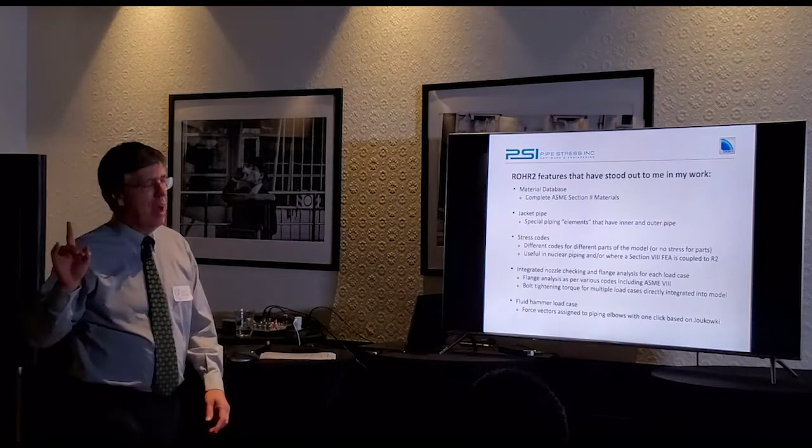Things I love about ROHR2. Material database. I hate going in there and typing in for every temperature some crap for a material that's not in the database. I don't know what materials you got in your database. ROHR2 has absolutely every single material from Section 2 in the database. It's kind of crazy because some of the materials have the same name and a different footnote. They've organized them. I will show you whatever you want on a web meeting or after this.

I thought Section 2 is for materials. Oh, okay, yes. Jacket pipe. If you ever have pipe in a pipe, there's elements in ROHR2 where you just say, here's the outer pipe, here's the inner pipe. It's a separate specification editor. Jacket pipe, you can couple it here, couple there. It's super easy to do.

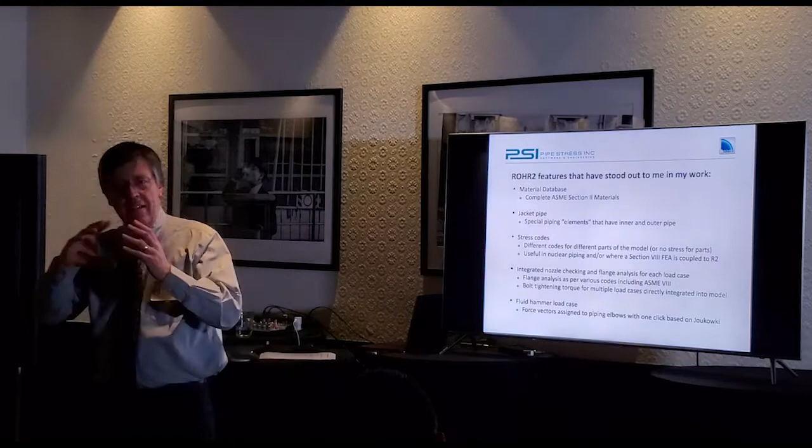Stress codes. ROHR2 can do different stress codes in the same model. Obviously, in the FE portion of it that I talked about a little bit, in this plates and shells model, you can't do a B31 analysis. You have to do a Section 8, Division 2, Part 5. So you do different parts.

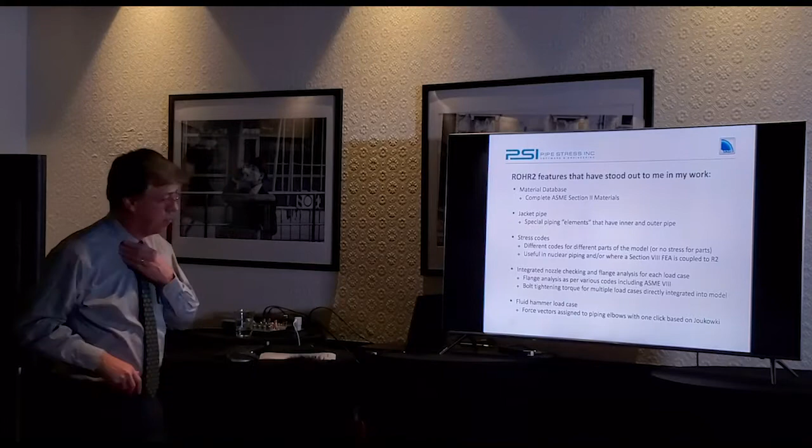And in addition, even in the beam theory model, and I run into this very often in nuclear, you have Class 2 piping going to Class 3 piping going to B31.1 piping. I just did a job with those 3 codes in the same model. So run part of the model Class 2, part Class 3, part B31.1. You get 3 stress reports. And the parts that aren't applicable, it doesn't run some weird stuff there.

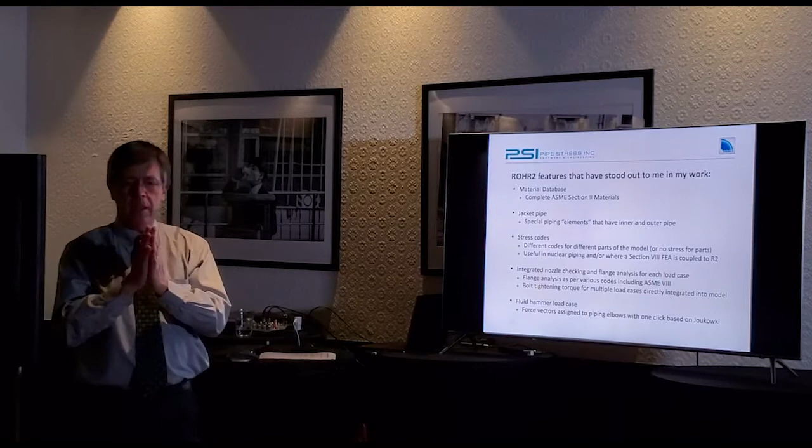Alright. I love the integration features. The integration of the nozzle checking, so you don't take your loads and go over here. All the load cases, no matter how many, get checked integrally in ROHR2. There's also flange analysis. I don't do this. I don't know much about it. Please don't ask me. But it does the bolt torque stuff. So all the load cases pass through the flange and figure out if the flange is going to leak and how much you got to torque it down. Again, I don't really use it. I like the integrated part.

Fluid hammer load case, if you ever do that, you calculate the critical length and so forth, and then you apply the force vectors. In ROHR2, you tell it the closing time, sonic velocity, and the flow rate.

You click on the pipe you want, and all the force vectors go in at every elbow, proportional to the length, right? All right, so what else have I got?

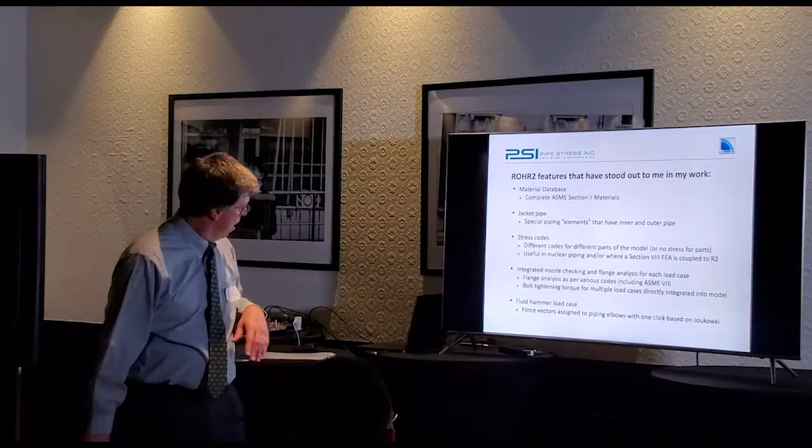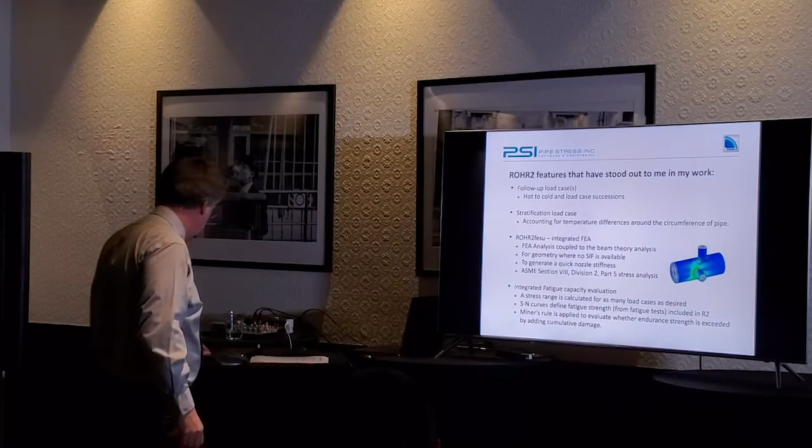That's all included. And then this is also something I've used a few times: thermal gradient. So ROHR2 will calculate the stresses if the inside of the pipe and the outside of the pipe have different temperatures. There's a very, very handy formula in class 1—even if you're not in class 1 piping, I apply this to B31.1 or whatever—where you have a linear distribution and a nonlinear distribution, and it adds it together.

That's all built in. And the cycles—you say, we did this because there was a crack in a hot reheat line underneath the boiler in the boiler piping after 6 years. And I predicted that because they started that plant every day. I predicted how many cycles of thermal gradient stresses it would take in ROHR2, and it cracked. This can also be added as part of the miner's rule to the other load cases, so that you can take the thermal gradient stresses and bring it in.

So the dynamic, we talked about this. One thing I'll mention is we can accommodate different spectra in different buildings, not just at different elevations, and then we can do a bidirectional write to Caesar II files. The last thing I'm going to talk to you about briefly is report generation.

We have to document our analysis, and I do not like documenting and copying and pasting—it seems very painful. I'm going to show you a short clip on that, and that's the last thing.

So I had a question.

A question on the temperature on the piping: can you run the piping, for instance, on a cold flare where you have a negative on the bottom, especially on the ground flare, within the same section of pipe—the bottom of the pipe is negative, cryogenic, and the top of the pipe is hot because of the flare? You mean the range, right? Yeah, so this program will calculate the bowing of the pipe, and tell you the load, both in this direction and through the thickness of the wall.

Okay, all right, let me show you one last little clip that I think you'll love, because if you like writing stress reports—creating stress reports in ROHR2 is a breeze.

The report creation in ROHR2 is driven by a template. First, you have to select which template you want to use by clicking on Documentation and then on Select Report Template. You can choose a template that comes standard with ROHR2, or you can create your own. Next, you click on Create Report, and that's all there is to it.

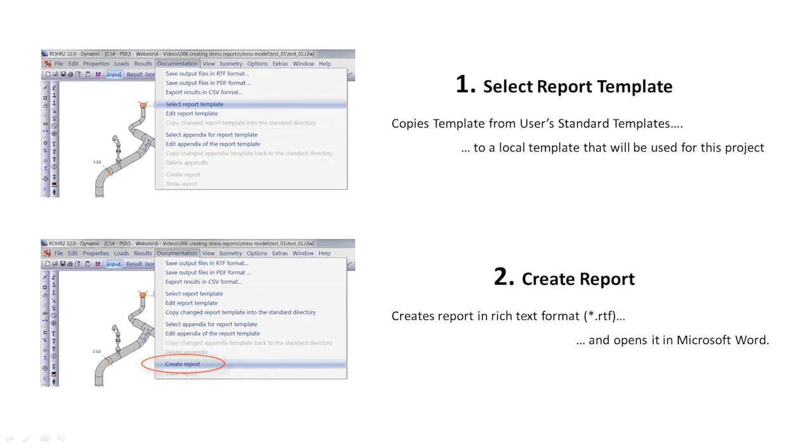Let me explain to you the concept behind this very powerful tool, and then I'll show you how to create and edit the template in ROHR2. To understand the concept behind creating finished reports so seamlessly, I'm showing you a portion of a template and the corresponding report that is created when you click Create Report.

There are two types of data in a stress report: data that does change from analysis to analysis, and data that does not change. Some examples of data that would typically not change are your logo and other text as circled here. Even this type of data is no problem to change at any time, in the template or in the final report. Multiple templates are also an option.

In this first bullet point, the words at the beginning of the sentence will not change, but the code governing the analysis could change, and therefore it is represented by the link text. The report generator takes this information from the current analysis, in this case ASME B31.3, and inserts it into the report. The link can even be in the middle of a sentence.

The next bullet point also has some descriptive text that would typically not change. This table is created by this link text. A plot or graphic can be inserted, as is the case with this link text resulting in this graphic.

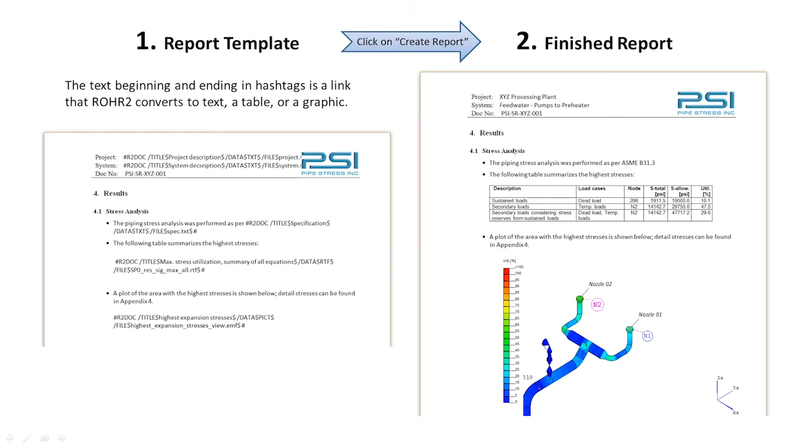You might be wondering how difficult it is to create links, or what links are available. To answer those questions, let me open ROHR2 and show you how easy it is to create this very portion of the report from scratch.

I'm going to display ROHR2 on only half the screen so we can see the template on the other half. Next, I'll click on Documentation and Edit Report Template. This opens two windows: the report template, and this window from which we'll pick our content and create the links we want. Let me populate the project and system fields in the header by inserting the proper links from ROHR2.

This data is part of the model file when you save it. To check the text that is currently in the project field, we can click on it and choose Display. The project description is arbitrarily called XYZ Processing Plant. Similarly, the system is Feed Water Pumps to Preheater.

By hitting the Copy button, a link is copied to the Edit Paste buffer. This link text is simply pasted into the template document where you want it to appear. We'll do the same for the system text.

Now we save the template and can have a look how our report is coming along by creating it here. The project and system links have now been populated in the header as well as on the title page here, where I had the same links.

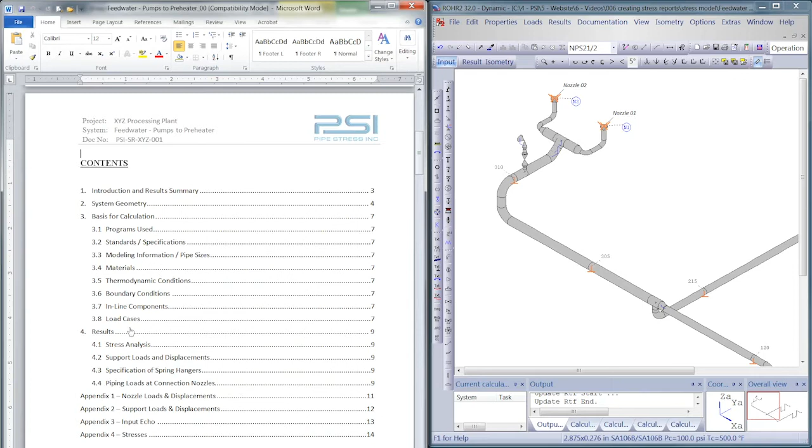Let me jump to the page where we made the changes. We can close this report and continue to edit the template. This field gives the code to which the analysis was made. Again, we can check it by hitting Display. Let's copy it to the template.

All the information you could possibly want in your report can be generated by links available here. So far, I've shown you simple text links, but there are lots of tables available for use in the report, such as a load case table, or which global loads were used in which load case. The table's fonts, column headers, column widths, and whether you even want to show that column are all customizable here, although the tables as listed here are very well thought out.

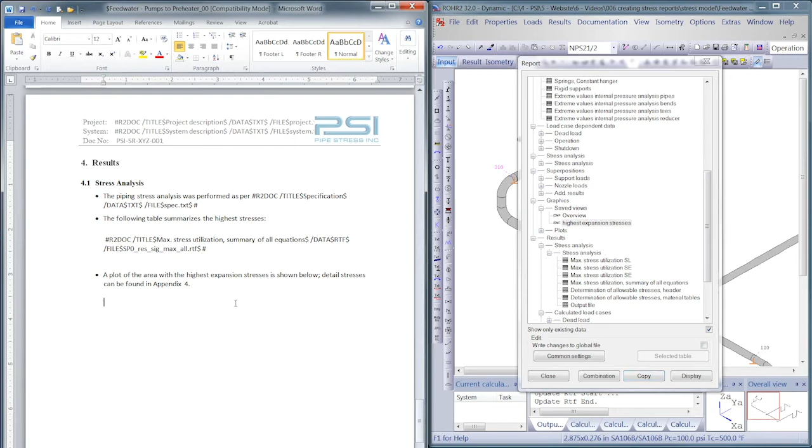From the Results section, I will insert the table under the Stress Analysis section called Max Stress Utilization, Summary of All Equations. Then, from the Graphics section, I'll copy the link for the saved view, highest expansion stresses. The video entitled Graphical User Interface introduces you to how views are created and saved.

Even though there are templates provided with ROHR2, I hope you've been able to see that creating your own template is easy and intuitive. Afterwards, generating a custom report is just one click away. Thanks for watching.

Since I sell engineering for a living, I look for ways to save time, because saving time saves money, makes it cheaper. Importing is a big time saver for me. Making these documents is a big time saver for me, and I don't like doodling. The whole thing comes out again, with whatever output file, everything, appendix. This is actually an older version of ROHR2 I made that video with, it's gotten better than that.

If I had a company that had 10 or 20 guys, I would really like the template, because you can change it and you'll all agree how it's going to look, and then bam, they're all going to look the same. And I think that's... let me make one more slide.

Alright, go ahead, did you have a question? Can you print or export piping isometrics out of the program?

Can you print or export the piping isometric? I usually make these views, and then I print them, and they end up in the report. It's a regular piping isometric. Yeah, there is an isometric generator. I'll be frank with you, I don't think it's that great. I don't use it, but yeah, there is. It's all ROHR2iso. But honestly, I like making my views and putting those in the stress report.